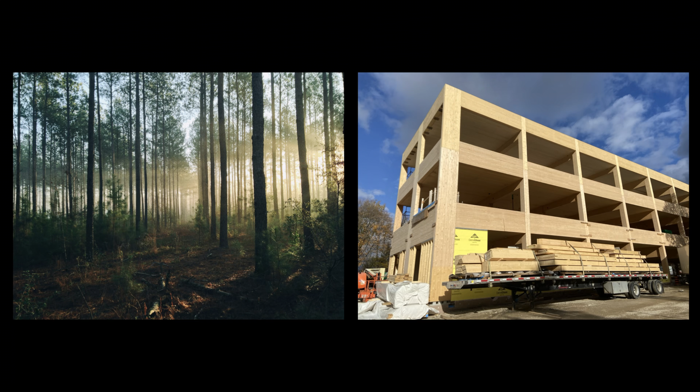I'm not going to stand here and tell you that mass timber is the only answer, but trees, especially in the last 5-10 years, have definitely emerged as a beacon of hope in all of this, among other low carbon materials, as we've just seen. And so when we think about wood, there's still a carbon positivity in terms of the manufacturing, but that raw lumber, as was just explained, in the forest sequesters carbon throughout its life.

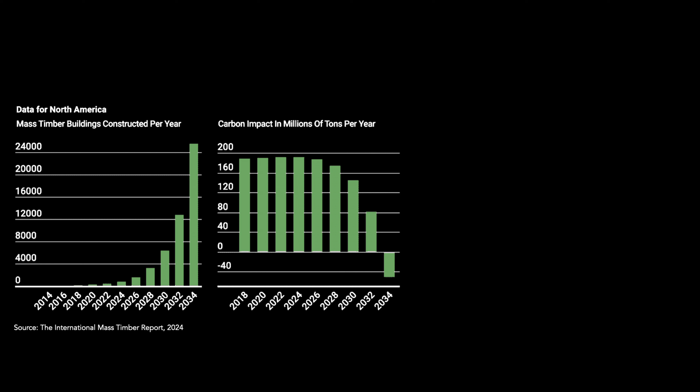So if we're comparing a structural material to concrete or steel, we still know that wood is going to be orders of magnitude less in terms of its carbon. And you can see that the impact in millions of tons per year is going to go down as we're using timber more and more.

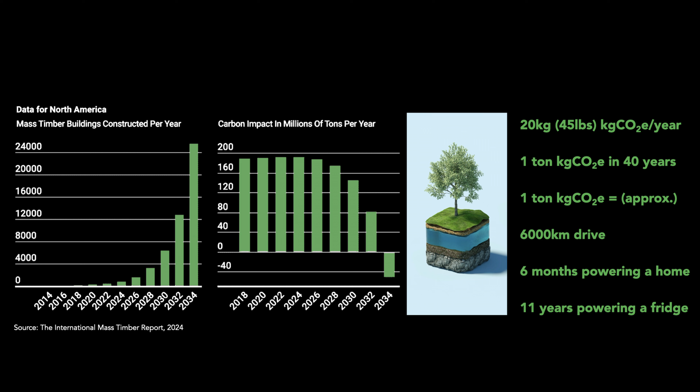So we know a tree can absorb over 45 pounds of carbon dioxide a year, which means that in 40 years a tree will have sequestered 1 ton of CO2 equivalent, which is approximately a 6,000 kilometer drive, 6 months of powering a home, or 11 years of powering a fridge. One of my students put it in terms of garbage bags during their presentation last week, so that was pretty funny.

But as demand for more sustainable construction materials and methods increases, mass timber is really shaping the future of low carbon construction in Canada, especially when we start thinking about Part 3 construction.

So one of the areas of research that's limited at this point: obviously we had to be researching fire so that we could be constructing above the 6-story limit of the NBC that was prior to 2020, but we don't have old mass timber buildings yet to be thinking about what types of issues might arise from exposure to moisture on site.

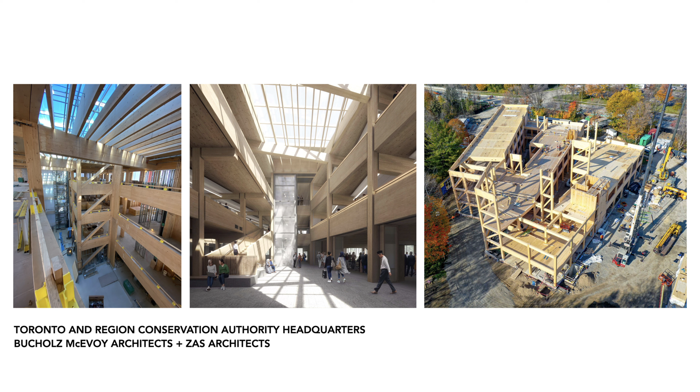So the first case study I'll be looking at is Toronto and Region Conservation Authority's new headquarters facility that's being constructed right now. It's nearing completion up near Black Creek Pioneer Village, near York University. You can see here in the superstructure, even the cores are CLT, which is also a bit abnormal in North America at this point. Usually they're using a hybrid structure of concrete cores with CLT superstructure.

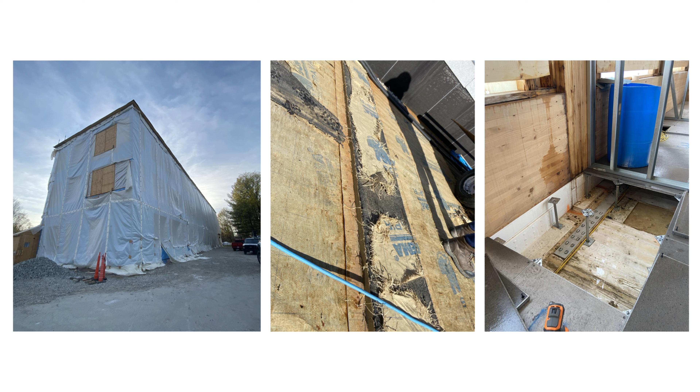But you can see throughout the much longer exposure period than they were anticipating, to be diplomatic, they were running into a lot of moisture issues. This is just on the floor assemblies, but my research will be focusing on the roof assemblies. You can see they're trying to figure out how to get rid of this water. They're squeegeeing it down the holes, and this leads to a domino effect of issues in trying to protect the wood while it's on site.

This is actually a skewed image of the roof membrane, which was applied to the wet wood and effectively got destroyed within a couple days and was starting to lift. You can see moisture pooling into the floor plenum through different orifices of the building, and just a lot of issues that you don't really need to be considering as much with concrete or steel buildings.

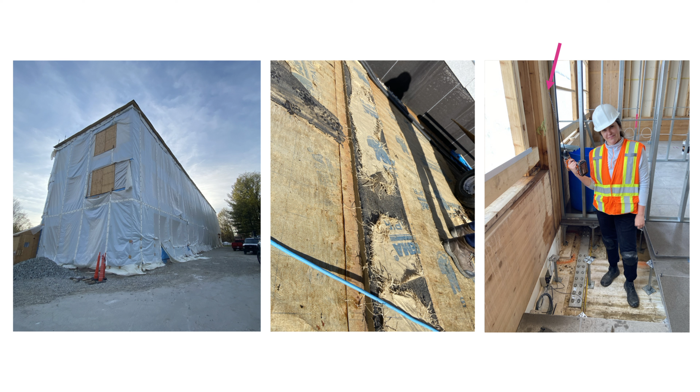And so, oh yeah, there's me installing sensors with a giant drill bit. That's the end of the bit, if you can't see it. Our sensors go right through, and I'll show a bit more on that in a second. The sensors under the floor plenum there go into the wall, and then we have some that are more exposed in the ceiling as well.

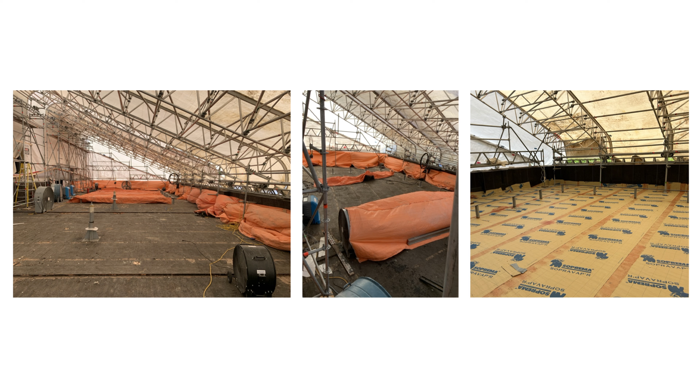And so just to continue that domino effect, what ended up happening on this site was they actually had to tent the entire structure and blow air into it for, it was like 5 or 6 months, I think, to dry out the wood before they could apply a whole new membrane system. So definitely something you want to be considering and avoiding when on site.

And so our research, just before I get into the basics here, looks a lot at a few different moisture mitigation strategies that are being proposed in the CLT Handbook of Practice and other resources. But there isn't really consistent moisture mitigation plans yet, even in Ontario, amongst the manufacturers we have here of mass timber. So just a few quick questions as a primer before I get into the main meat of the research. How does wood get wet and store moisture?

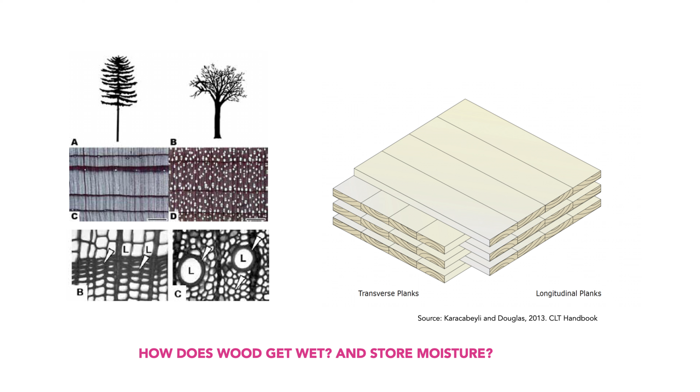Well, at a microscopic level, wood is hygroscopic, so that means it has all these little holes that are called lumens that are storing water. And this softwood is the type of wood that is typically used for mass timber products. You can see it's a bit more homogeneous, and so for me that means I can predict how water is going to move through this type of wood more easily than this type of wood. Anyways, that's my own thing. But we're talking about bulk water and water vapor when we're talking about moisture content.

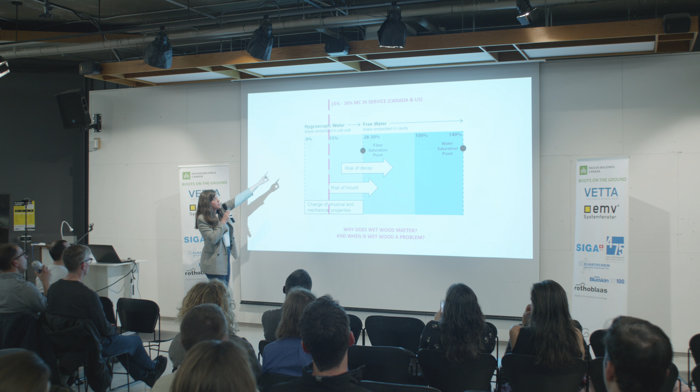And so why does wet wood matter? Basically, according to the large majority of research to date, the risk of mold starts at around 15% moisture content in wood, and that varies depending on the product and the species, but that's the rule of thumb. It's also what the PRG 320 standard states that wood should be in service in Canada and the US. And then the risk of decay, so risk of mold is what's going to affect occupant health in the building, and risk of decay is what's going to start to affect the actual structural integrity of the material.

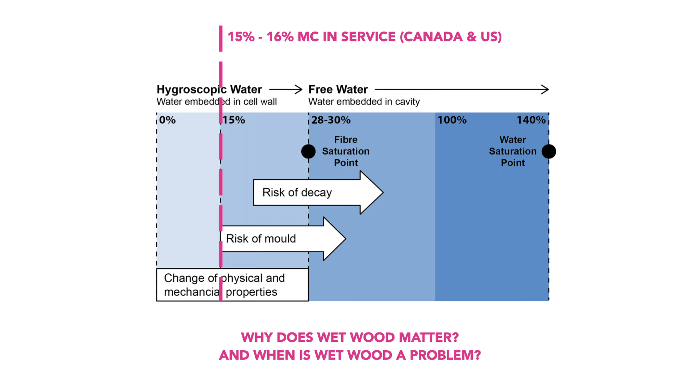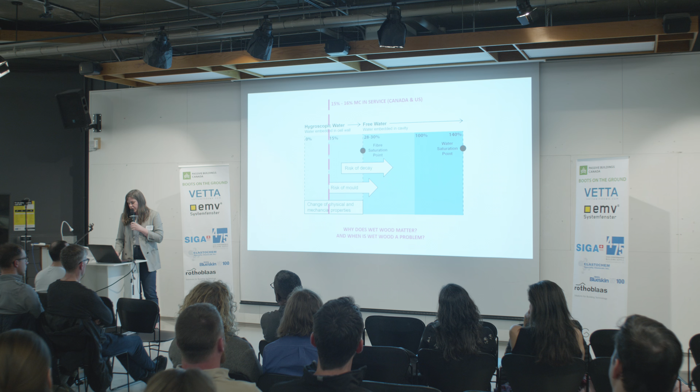And the risk of decay is a little looser in terms of what I could find in current literature, showing above 20% for sure, 22% range, we start to see that. And so we were getting off the chart readings at the TRCA in their roof, especially above 30%, which is actually beyond the limits of what even the sensor can measure. So above 30%, we're like, okay, it's super wet, I don't know.

And so where do we typically see wet wood on site? We see it coming primarily through the end grain of the wood, so parallel to the wood grain itself is where moisture is coming faster into the material. So at any kind of cracks and joints, you know, mass timber isn't a perfect material, so this is quite common.

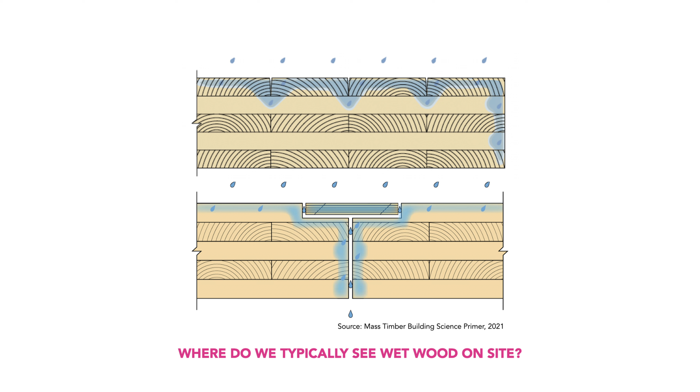And then these little, what do they call them? Surface splines, but they're effectively little bathtubs on the surface of the roof where water comes in, sits in here, and then they put a little piece of plywood that gets screwed in, and that plywood just gets super soaked and holds the moisture against the end grain of that area of wood. So that's where we were seeing the highest values.

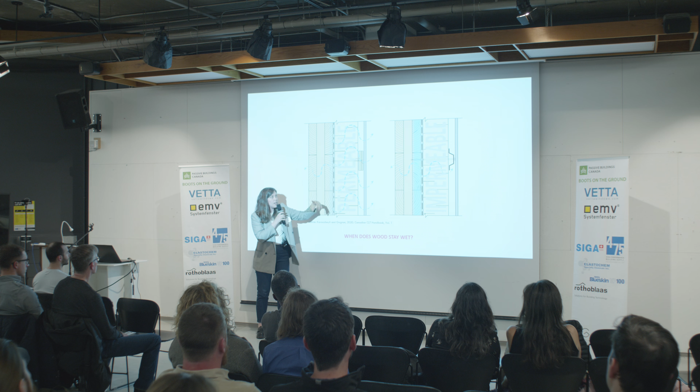And so this is a wall assembly, but I thought a great diagram showing also the impact of different types of membranes being applied. So if you're looking at a permeable membrane, we know that we can dry out through that membrane, whereas if you're gonna slap an impermeable membrane on wet wood, it's going to have a much harder time drying out, and that dry out period is much longer in wood than we are used to considering when we're slapping these products onto buildings.

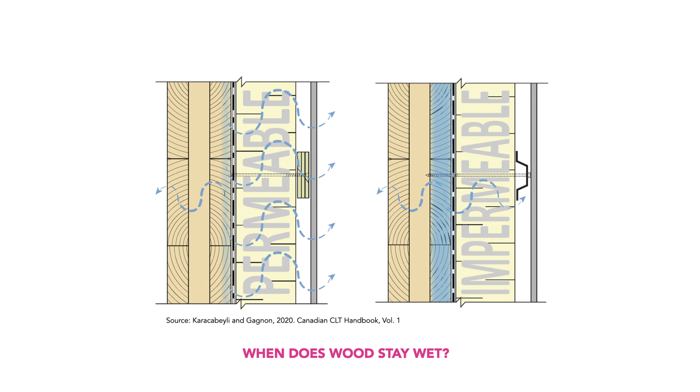One other aspect that people are looking at is actually the integration of this air cavity into the roof assembly, so it's a bit unusual, and they're looking at whether or not that would be mechanically vented. In my research, I'll show you, we just actually put an air cavity there and didn't even vent it, just to see if that would improve the capacity for the wood to dry out.

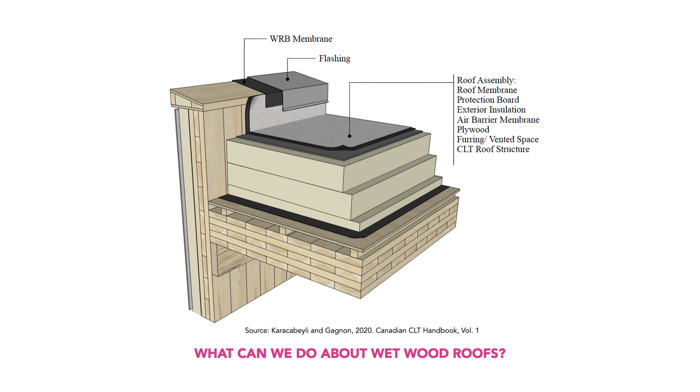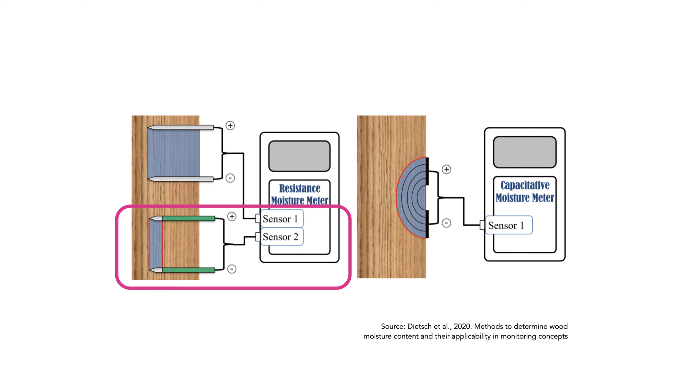This is how we were monitoring this, using a pin probe moisture content sensor. These probes are insulated to a point, and they take a resistance measurement between the two probes to tell us the moisture content at specific depths throughout the CLT. For example, in a wall or roof assembly, we can get several different depths throughout the CLT, and that's one of the installed sensors in our panels.

Here are a few images of the sensors installed on site. That's my colleague Yash up on a ladder with his laptop, doing something there.

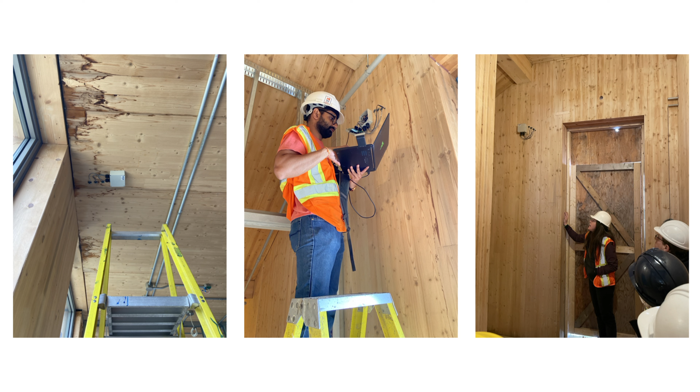This also shows part of what the TRCA is doing, trying to encourage tours of the facility. Part of that is going to be our research. We're going to install some signage and probably QR codes so you can access the data. It's public.

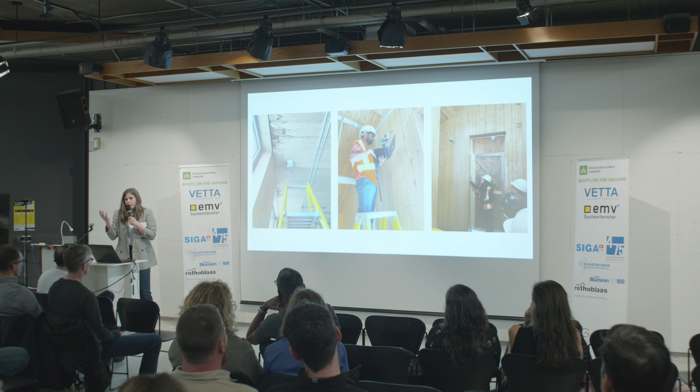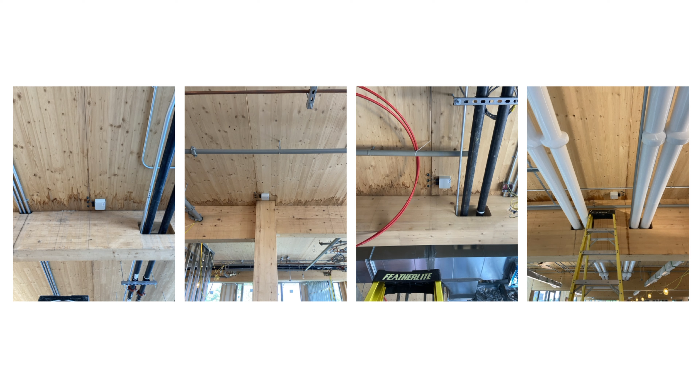I already introduced these, but the three main variables we decided to test with the roof assemblies were: whether the assembly was protected on site with a pre-applied membrane before exposure to high moisture conditions, what type of vapor retarder is used, and whether or not there's an air cavity included.

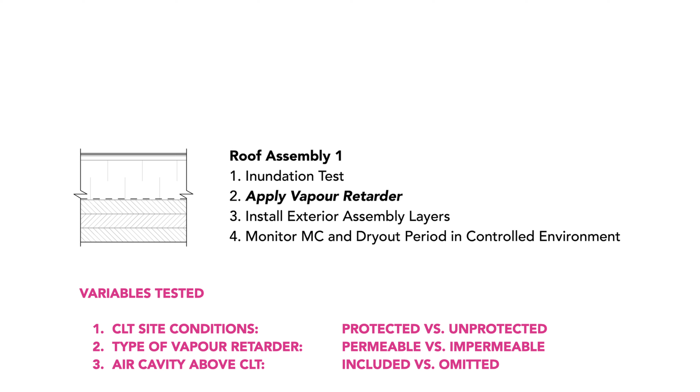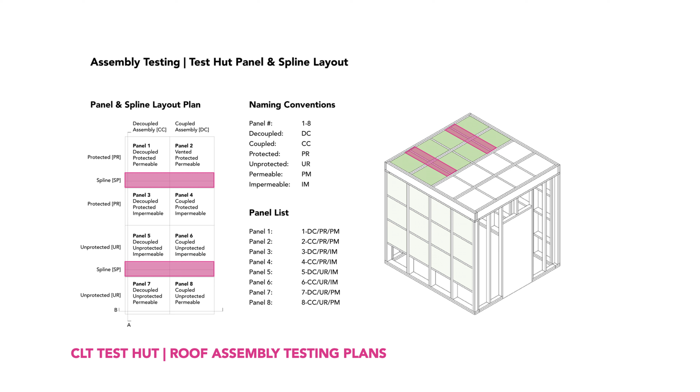In order to compare apples to apples, we decided to construct this test hut. It's actually just over at what we call the B-top site, at Dundas and Mutual. There are 8 different panels looking at that there.

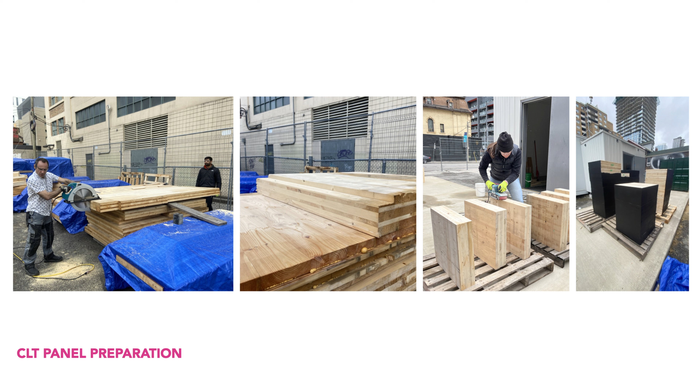This is us prepping the panels, and you can see the little spline here. We basically sealed the edges of all the panels so that we could assume the result was continuous.

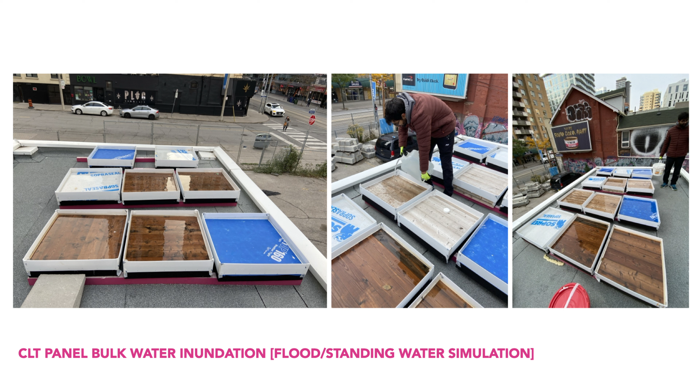This is all of our sensors getting installed on these panels. Before, for two months, they just sat on the roof of this facility we have on the B-top site. Then, for the two months directly prior to installation in the test hut, we super soaked them — an inundation test, as we call it in building science, basically a bathtub on top of these panels.

You can see some panels are protected and some are unprotected, and some are protected with permeable membranes while others are protected with impermeable membranes.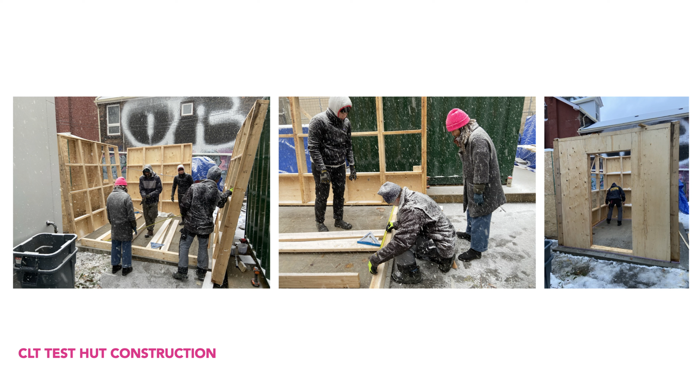We decided to start building the hut in a snowstorm in October. This was just — as I was going through the photos, I found this lovely compilation of Greg's face. Anyways...

So we're putting the panels here. Yash is working on some different wall tests, and you can see the roof test panels up there. But the most important part was what was happening on top of the roof.

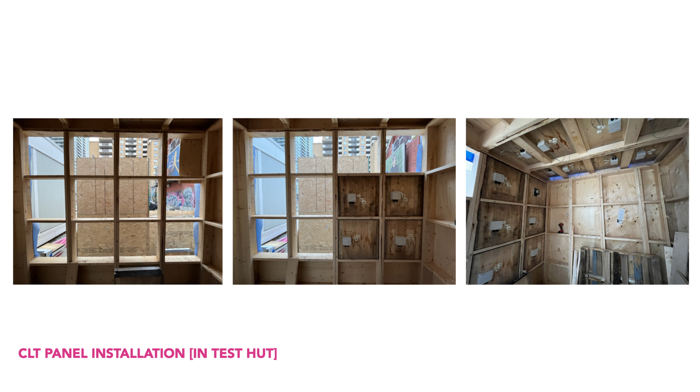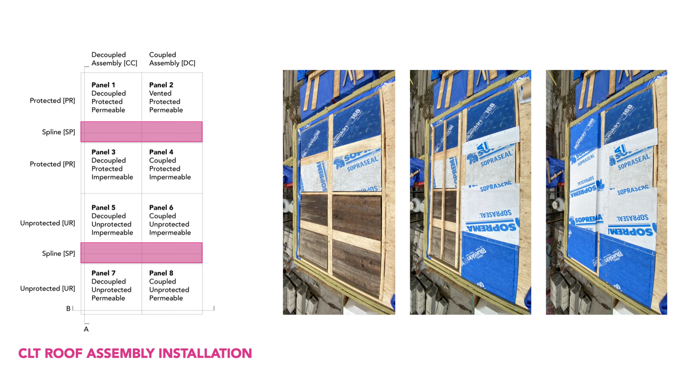You can see the 4 unprotected panels, and then we have impermeable and permeable vapor retarders on them as well. You can also see the air cavity strapping going into those ones, as well as the splines. Those are the splines, and you can see how the sensors got installed.

These are the typical panel sensors, and these spline sensors take the reading of moisture in the spline itself and directly below it, so we can see how much is moving from that plywood bathtub into the CLT. And that's just a view from below.

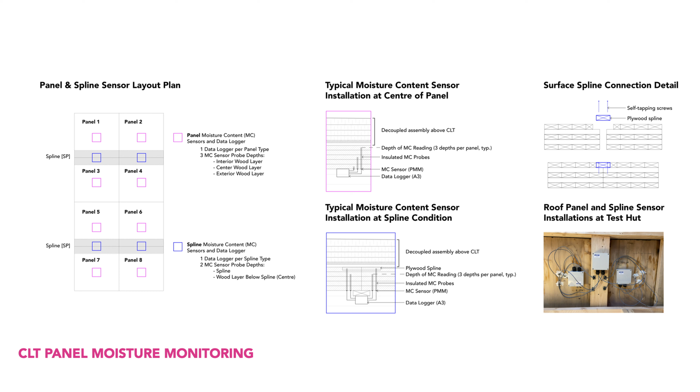Now, this is really tiny. I know it's tiny, but I'm at the phase of data analysis right now where I sort of squint when I look at it, because I'm trying to just see big picture relationships at the moment. So here, you probably don't need to squint because it's already squinty.

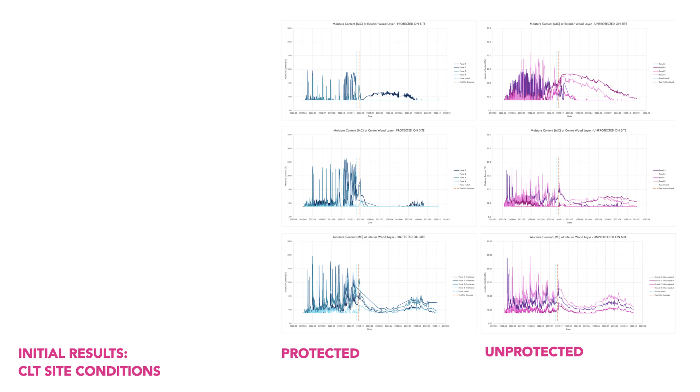But the protected versus unprotected, you can see in the unprotected case, you have much higher peak moisture contents, which is honestly as predicted. And so that just really extends the dry out period. So the next phase we'll be looking at how long we're in a mold risk zone, basically.

Impermeable versus permeable, you can see again, impermeable especially. So these are just the different layers - I should have mentioned that. This is the interior wood layer, center wood layer, and exterior wood layer. So you can see especially on the exterior wood layer, what happens is the wood starts to dry out this way, and that layer actually gets loaded against the impermeable membrane and takes even longer to dry out.

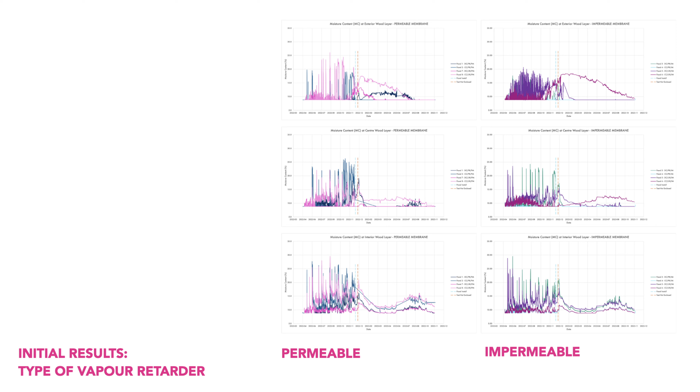And then whether or not you're including an air cavity or not. So you can see where there's no air cavity, that's where we're seeing a lot higher moisture content in that most exterior wood layer.

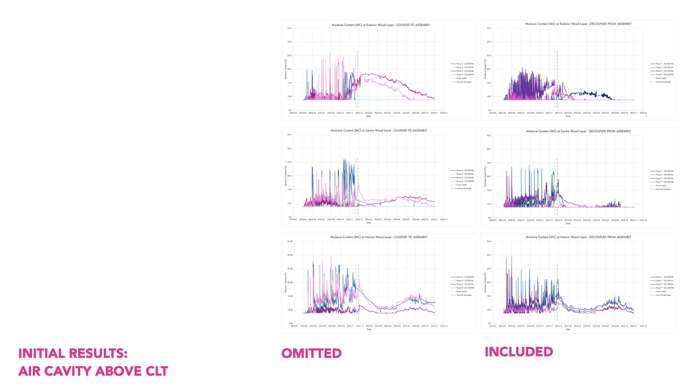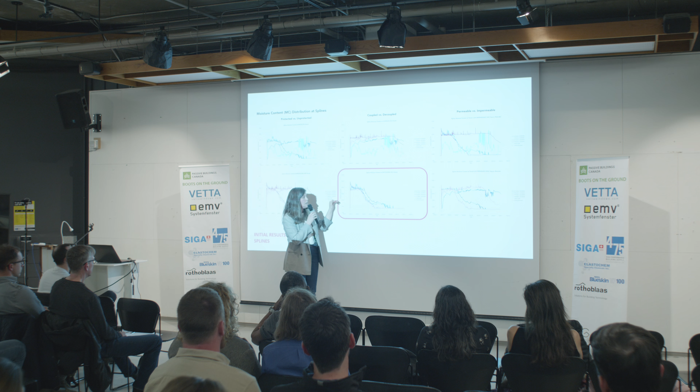This one's quite squinty, but we had some weird things happening with the sensors here. But the one graph that looks really quite clear to me is this one - this is for the splines in particular, and this is including an air cavity. So you can see that we can predict the dry out of those spline conditions when you include an air cavity above them quite well. This timeline is probably about a month before it starts drying out.

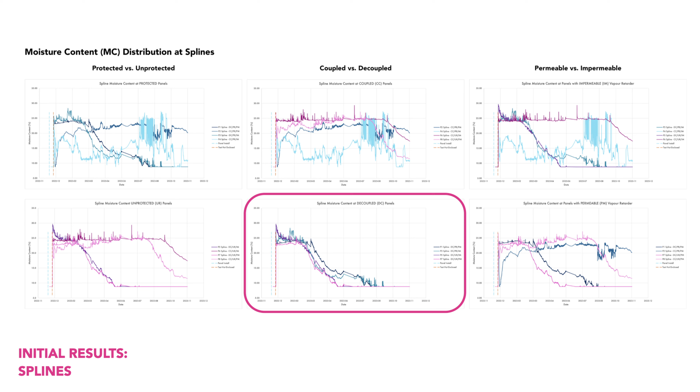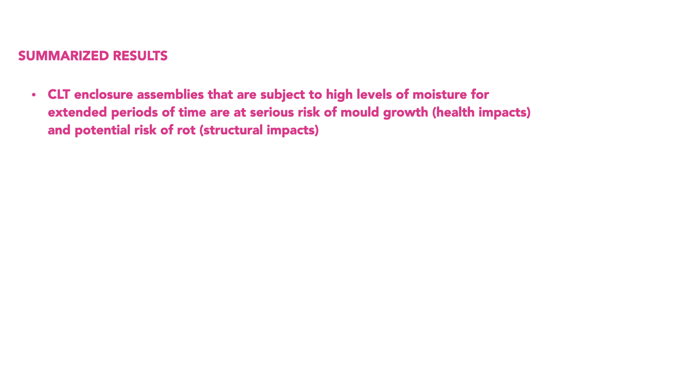So to summarize where I'm at currently: CLT enclosure assemblies that are subject to high levels of moisture for extended periods of time are at serious risk of mold growth, which could potentially contribute to health impacts and potential risk of rot structural impacts - those we're seeing less of. Above that 20-21%, that's quite wet, so we're really in more of the mold growth range.

Unprotected CLT is subject to much higher peak moisture contents and takes much longer to dry out after enclosure, even with the presence of an air cavity. So that higher initial moisture content showed panels in mold risk zones for a few months before they started to dry out. We were only ever able to get our panels up to about 22-23%, compared to the TRCA, which actually had them much higher. I don't have that data yet from the TRCA, but I'm collecting it now.

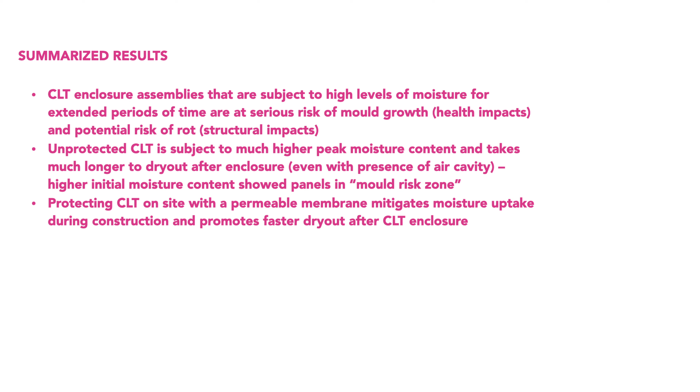Protecting CLT on site with a permeable membrane mitigates moisture uptake during construction and promotes faster dry out after CLT enclosure. In CLT panels, including an air cavity had a similar effect on dry out rate as the use of a permeable membrane. So if you're using a permeable membrane, it's going to dry out faster, which was expected, but the presence of an air cavity was the same relative to that.

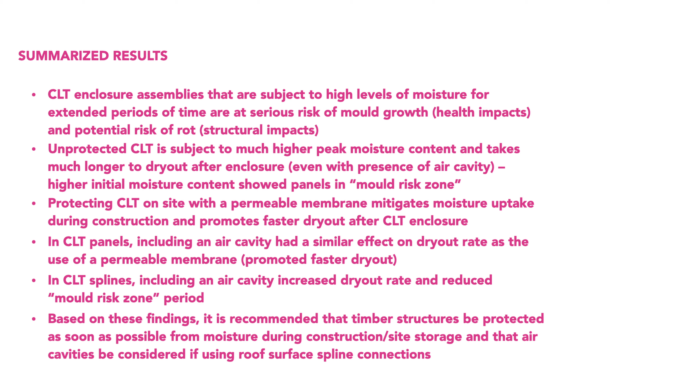In CLT splines, including an air cavity increased dry out rate and reduced the mold risk zone period. Finally, based on these findings, it's recommended that timber structures be protected as soon as possible from moisture during construction. That feels like an obvious thing, but we can see the direct benefits of that. And then that air cavities be considered if using roof surface spline connections. So we didn't find as much benefit to the air cavities in the panels themselves, but depending on how those panels are coming together, it's something you might want to consider.

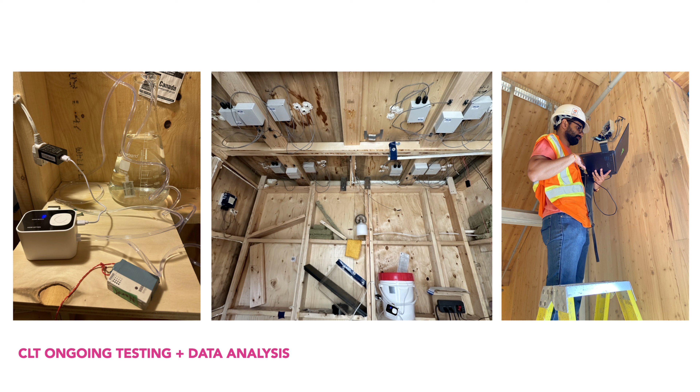So moving forward, this is Greg's contraption - he's soaking the panels right now, so currently it's raining in the test hut. We're trying to mimic a roof leak scenario and see how fast the panels dry out in that case. I know at TRCA they do have a leak detection system, but it's not the expansive one - it's sort of in points.

And further to that, like I mentioned at the beginning, we don't have 20-year-old mass timber buildings yet to be thinking about. So the point of this research also was to collect data that would allow us to simulate longer term conditions, so we can predict the moisture fluctuations and predict if there is a roof leak. If your wood gets to, let's say, 22-23%, how long is that going to take to dry out? How long are you in any kind of mold risk or decay risk zone?